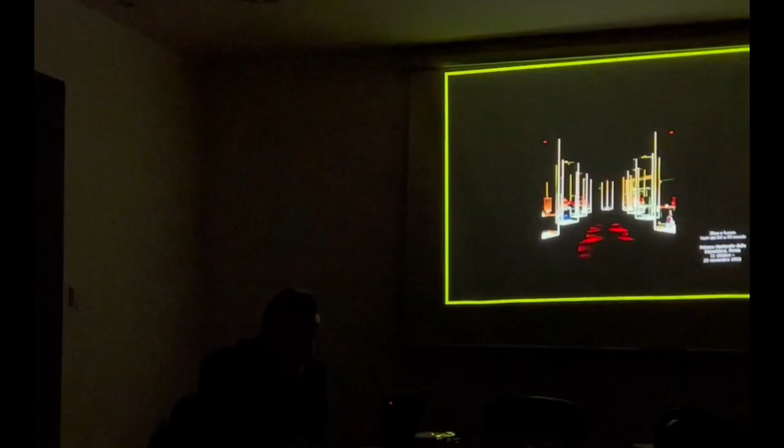So using polycarbonate, the result is this, a picture from the exhibition. There was nothing, the dark and the light of the intersection of the polycarbonate, which by diffraction gives this impression of lines of light. Of course, now it would be impossible to have something like that for safety reasons, but it was completely dark, and all the bowls, all the products of the artistic design were floating in the space.

But my main focus, as Nicola Scardigno told before, was on massive load-bearing and space-closing material, which is Mediterranean material, which differs from Gothic material and what derived from Gothic, which is much contemporary architecture. The light architecture, which we call international architecture, is really derived from an idea of structure, load-bearing but not closing space. This one is an architecture which is based on massive material, on shadow, light, and things like that.

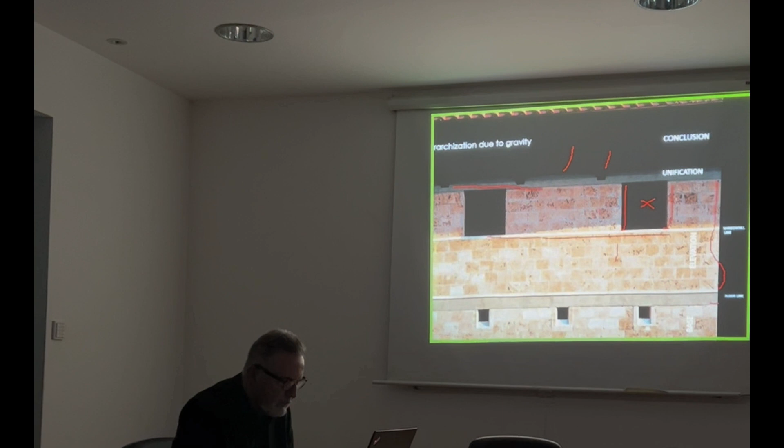This is the second phase of construction. The material was changed, it was another kind of stone, much more pale, so the idea is of a more abstract construction. And all the cemetery was based on the idea of a city. Like in a city, all the chapels were aligned along a road with special buildings, like in a city. And the special building always derives, in our way of seeing architecture, from a specialization of the house. So also here, this small chapel is derived by melting two houses, 1 and 2.

And all the light in the cemetery is very pale, a very dark, we can say, road, the inner one. But here there should be some light going inside and giving a different character to the chapel. So I prepared this format for the glasses.

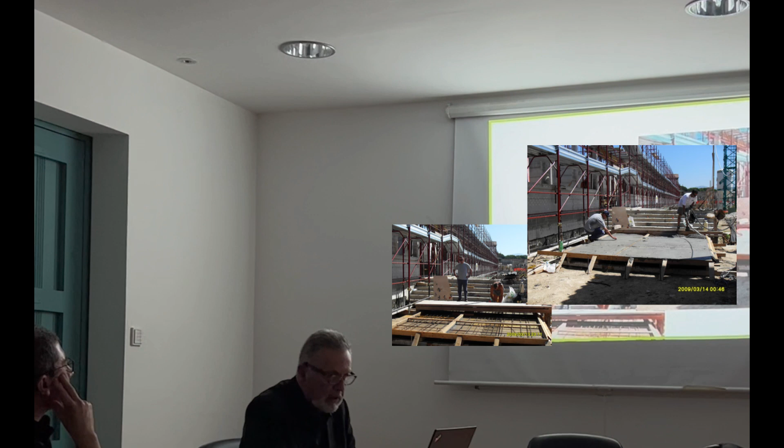I collected sunglasses from Florence, from different places, and after I made this cast concrete horizontally to have an idea of the wall like a cloud, not smooth. This is the result, you see it's very cloudy, the concrete, in such a way to have here smooth concrete, here cloudy concrete, and this blade of shadow coming from the roof.

And all the cemetery is based on this dialectic between heavy, the wall, and the light, which is also the metal structure. Terni, the place in which the cemetery was built, is a place of steel industry. So this is the steel roof, and also other parts of the cemetery. This, for example, is a tower built in steel, and these are the sheets of steel which are used for the floor.

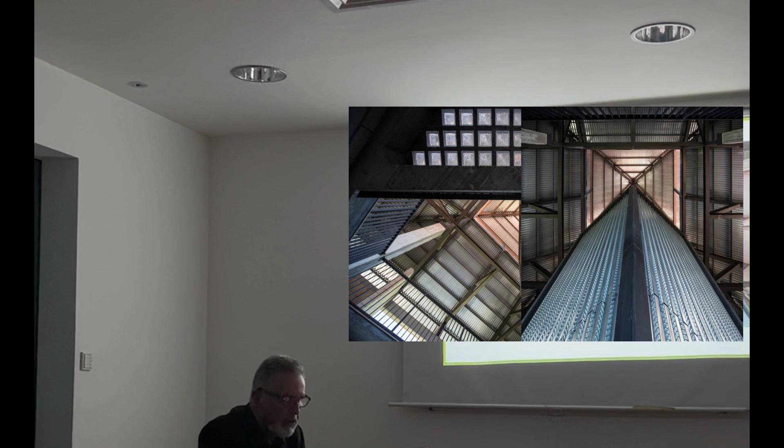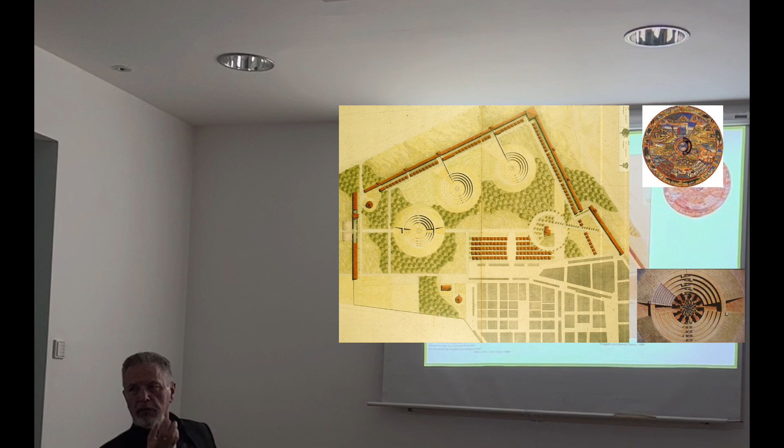This is the layout of the cemetery. We have built now this part, and we are going now to build the craters, which are a symbol, a feminine symbol, a Latin idea of the dead, not Gothic. The dead as regeneration. So these are the image of something uterine, which generates, like in all Latin literature.

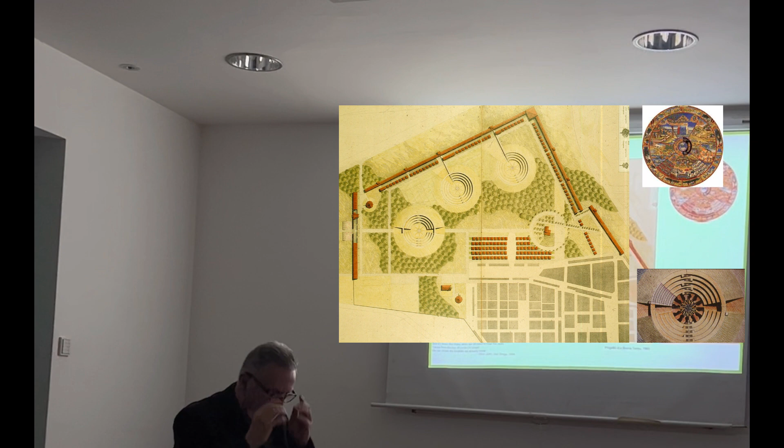Going very fast. This is the last part, the more recent part of the construction, because the construction will go on for probably 50 years more. It started 50 years ago and will go on for another 50 years. This is the last part, where the construction is quite concluded.

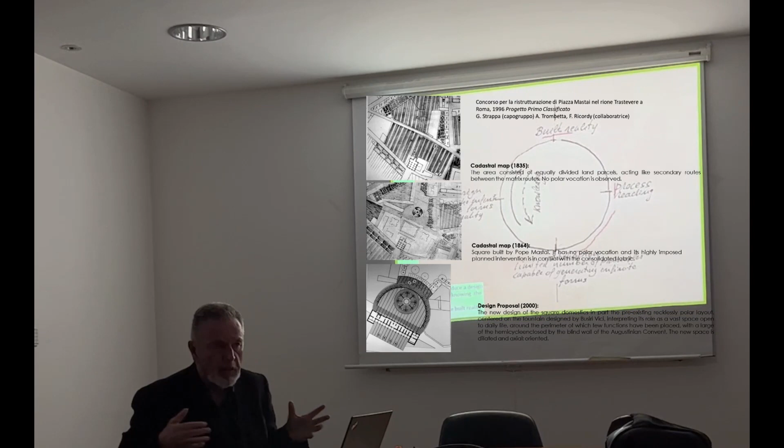So, this is another idea. As I told you, the built organism is the new matter of the fabric. So the fabric also is a circular process in which we study the built reality, we study it as a process, we read the process. From the process we derive an abstraction. Any morphologist says this, to recognize the general in the particular. Whitehand, Conzen, Muratori, to see what is general in the particular. And from the general we derive an abstraction, few rules, which can in turn generate infinite possibilities of generating new forms.

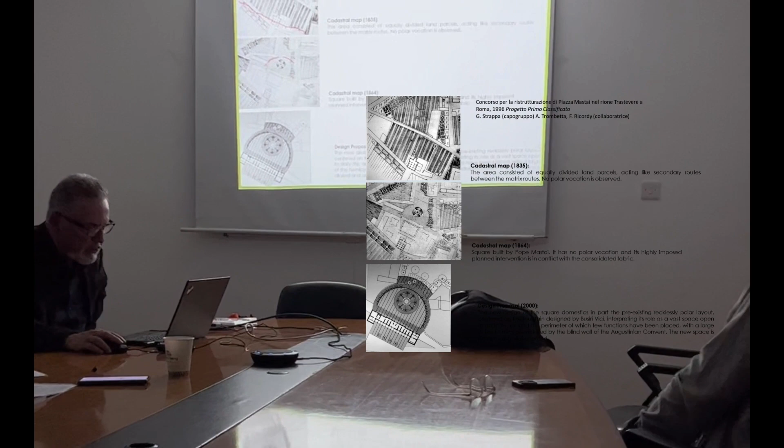So, quickly, some examples of this process. This is, for example, a competition for Piazza Mastai. This is the forming process. Here, for who knows Rome, they built Viale Trastevere, and this is the forming process from the rural use of the land to a transformation in the 19th century with the fountain, and this is the last part, which is the design proposal. So following the process, we arrive at a contemporary interpretation. This is the square built, the transformation of the square like it is nowadays.

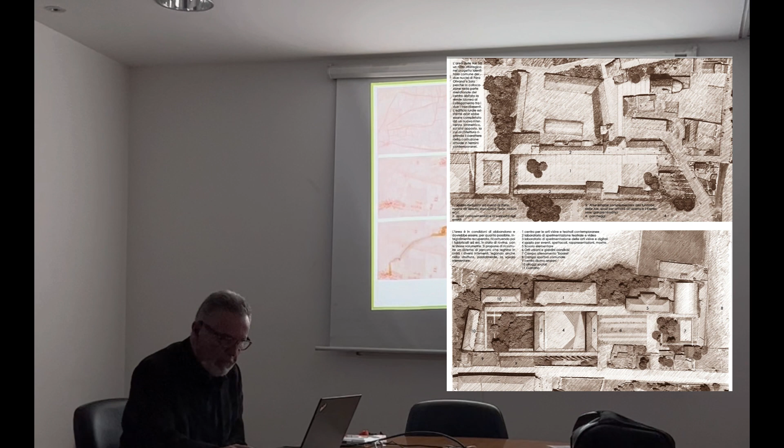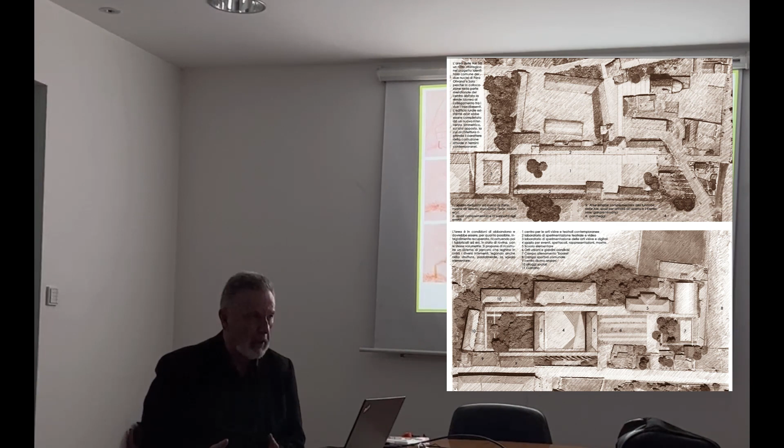This is another experiment we made very recently with Francesca and Matteo Oliva. It is two small settlements near Bergamo, North Italy, which are part of the same administration, but they are separated by a motorway. So the competition had to form an identity. So the true identity for us was the substrata, which was a Roman centuriatio, which was organized here. You can see we have reconstructed the centuriatio.

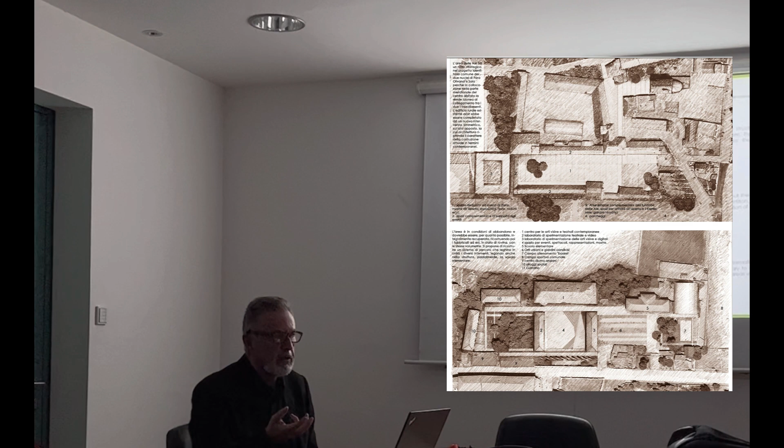And on this we have based a design, this is the actual phase, which in some way continues the alignment as a memory and identity of the place. It's not just the settlement, it's the substrata, and so on. So this is the design we have made. We have made it inside the research. Ilaria presented this morning some of these drawings.

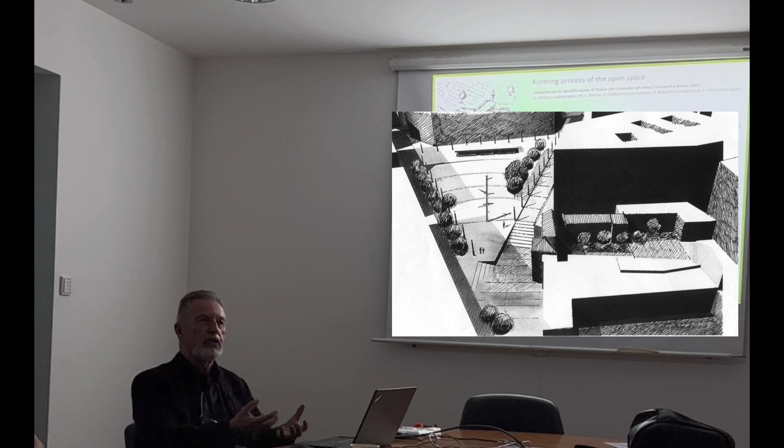This is another one. In any project we follow this process, and it's very useful. It's been very useful for me to collect all these projects, all these designs, because I understood that there is something which derives from the practice, something which is theoretical and is derived from the practice. And this is the competition for Piazza San Cosimato.

So for this one I want to use some minutes more, because my opinion is very clear. It is the competition for Carezzano. It's very simple, in my opinion, and very clear as a method, and maybe it's useful to understand what I mean when I say the method of studying the process. The place is this.

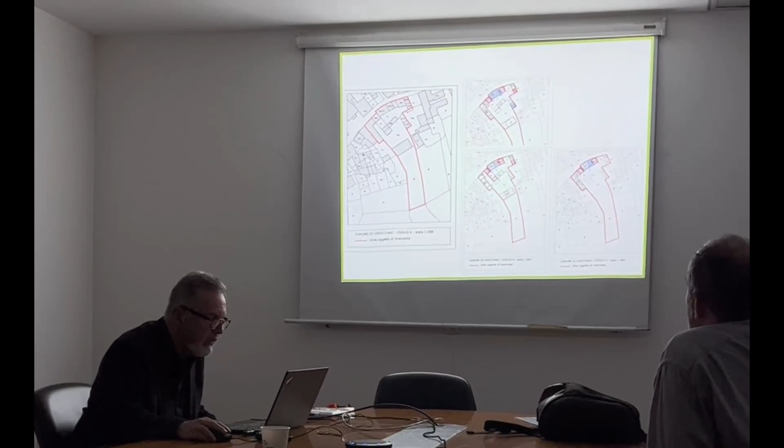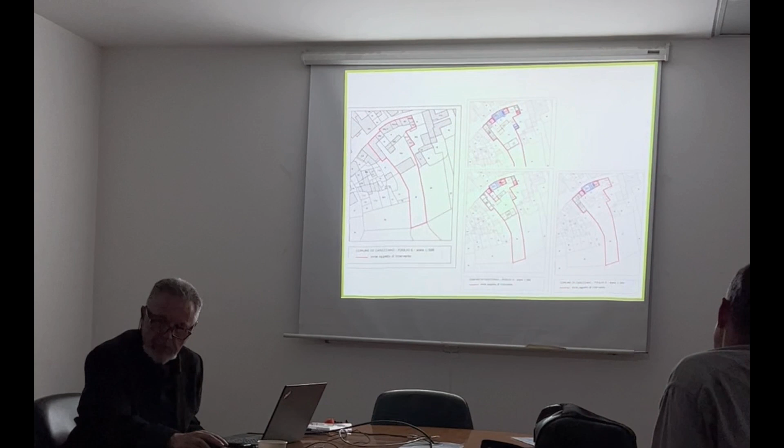You see, it's very easy to understand which was the original settlement, which is this one. This road, ancient, which avoided the center. The competition was about this part of the fabric, which was of Middle Age origin. So the first thing we did is to search for the cadastral map, which was not provided by the competition, because they expected something completely new, which went abruptly inside the old tissue and regenerated everything as a miracle.

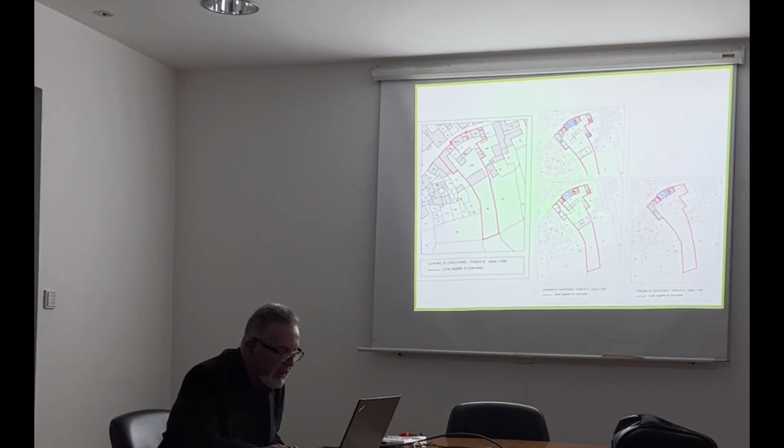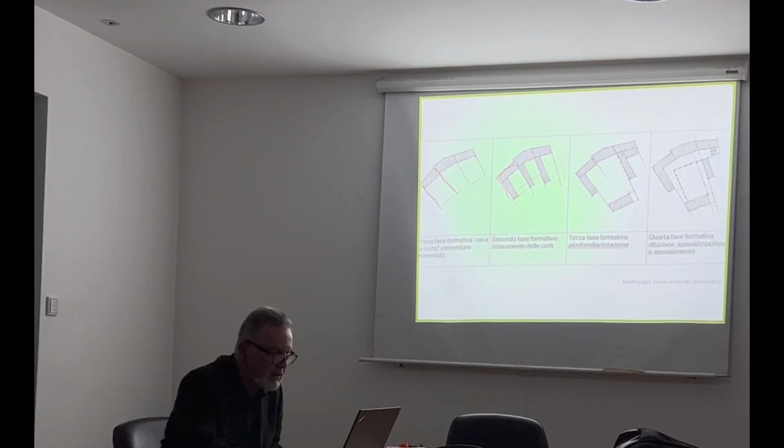So we collected all the cadastral maps and discovered that the origin of the process was very clear. There were 3 courtyard houses, you see. This is the origin of the courtyard house, the elementary courtyard house. After this is the second phase, in which there was the first infilling. Also this is very clear. You can't demonstrate it with documents, but with morphological and typological tools you can understand easily that this is the other phase. Another phase is the fusing, melting of the different parts.

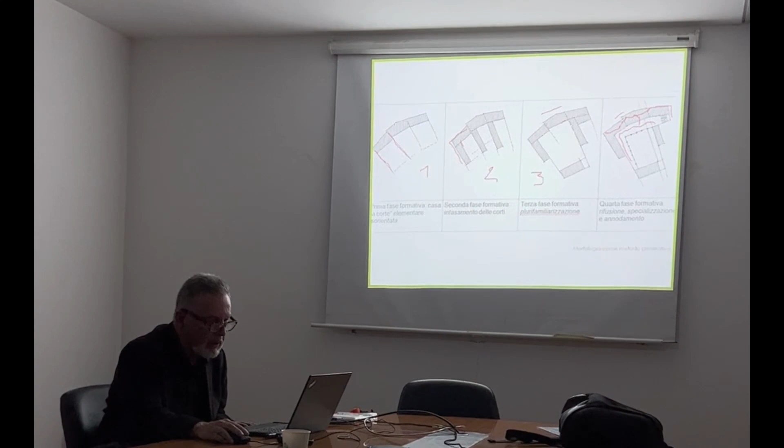And after, the last part is the transformation of this house into a special building, like a kind of palazzo, in which all the external roads are overturned inside, resolved inside, and form a kind of small palazzo, like a small city which is revolved inside. So the first one is practically sure, it's like that. The second one is true. The third one is true as well. The fourth one never existed, but is the design.

It's the way in which, in our opinion, the built reality should transform, knowing that this is not the only possibility. We have chosen this because we have always studied palazzos, so we think that the specialization of the houses should be the melting and transformation into a palazzo, but this is the logical result, demonstrable, which could be shared with people, could be demonstrated. It's not an individualistic interpretation of the topic, and this is completely modern, because we didn't use any imitation of the past for the new part.

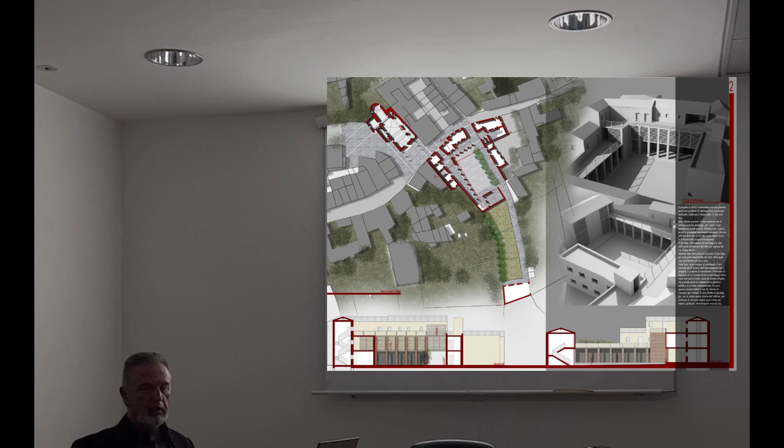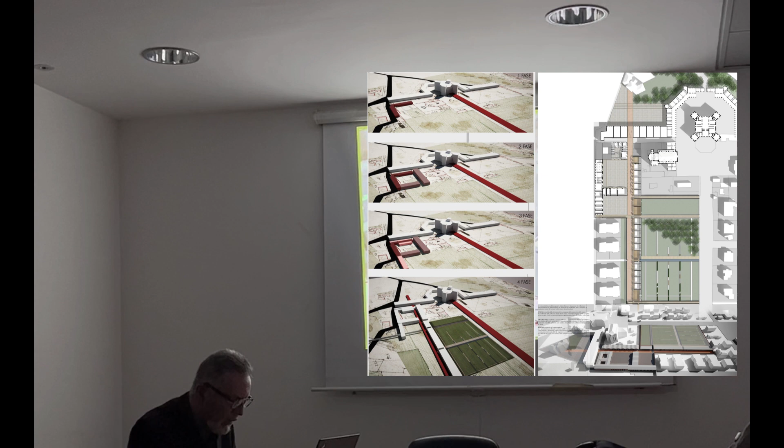New technology, energy saving devices, everything is completely new. But we preserved as much as we could all the existing part of the building, because it's huge walls. It's not possible now, economically it's not convenient to build something like that, and it's very, very good for energy saving, for the duration of the building, and so on. So I go on very quickly because I suspect that my time is running out.

So the same for the territory. This is, for example, a competition for Mendoza in Argentina. We follow the process. This is the first Spanish settlement, planned settlement, the expansion, the new planned settlement, and here, this is the object of the competition. There was a railway park, abandoned, the Trans-Andean, a railway which crossed the mountains, enormous mountains, going to Chile.

So this railway was abandoned, the park was abandoned, so the idea was to transform all the abandoned railway station, which is an enormous area, you see here, into an area which is not separate but connected with the rest of the city, in the conviction that the city is an organism. So any part should work with the other, should be in relation with the other.

And to conclude, just to say that the morphological analysis and the following of the process is not a machine to produce design. You can also be against the process sometimes. Not everything made by history is good. We don't accept anything which happened. Otherwise the smoke was also produced by history, but we don't accept it. There is something which we can refuse and we can check. So to conclude, I would like to present this example.

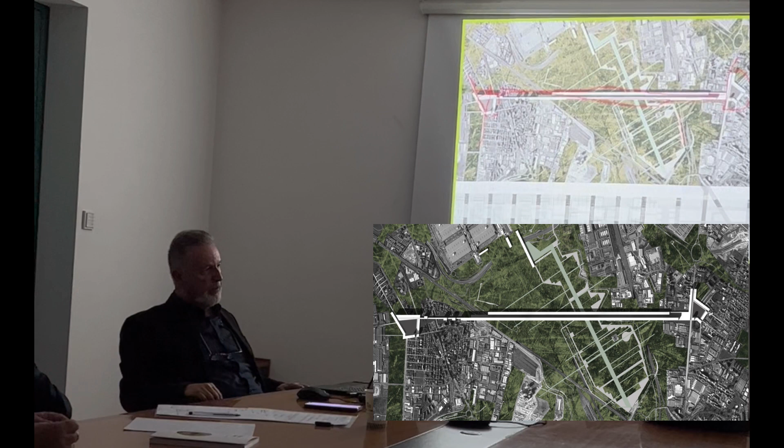So we follow the process, make some knotting in some parts of the tissue, here and here, but after, provide new nodes at territorial scale, here and here, the places in which there is an intersection of the fabric and the specialized fabric, but also something which connects the new pole for 2.5 kilometers, which is completely new and overlaps the place of the exhibition, and is something in the tradition of the huge linear city, the idea of the big building which overlaps the territory.